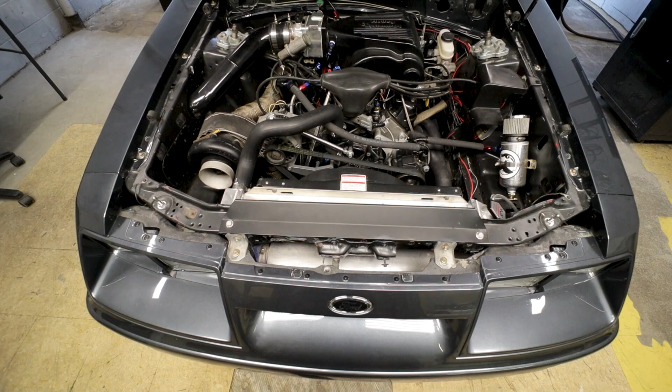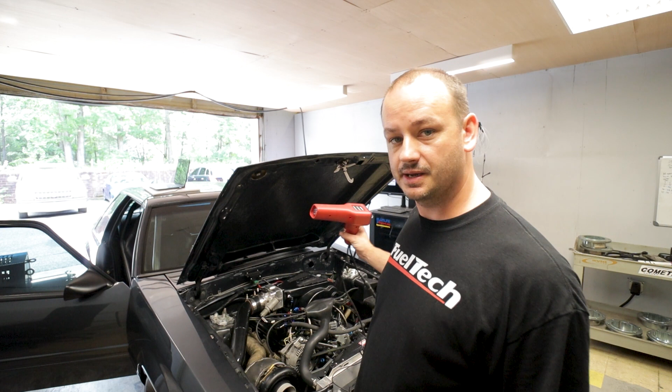It's running good. Playing musical cars, found that the startup and the idle needs a little work, so I'll tinker with that now. I'm going to set the timing, and we should be about ready to start trying to make some power.

So it requires a little throttle to start it, which means we need some more airflow, but I'm maxed out on airflow in the ECU, so we're going to need to make a throttle body adjustment. That's better.

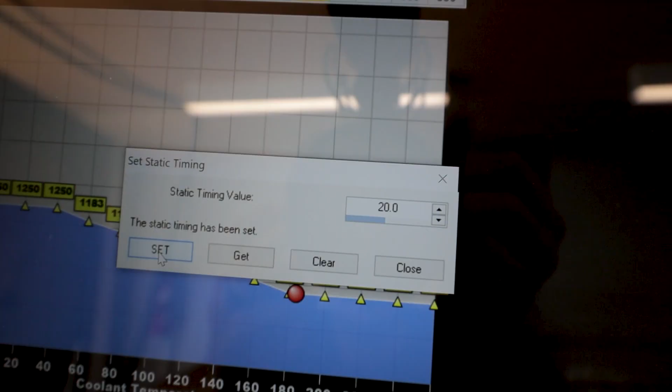Fuel looks good, closed loop's turned off. We need to let it warm up, and so far so good. So basically the timing's locked at 20 degrees right now. I'm sure you can't see it, but basically yeah, we're at 20 on the ECU, 20 in the timing light. They match up, so we're good to go on the timing.

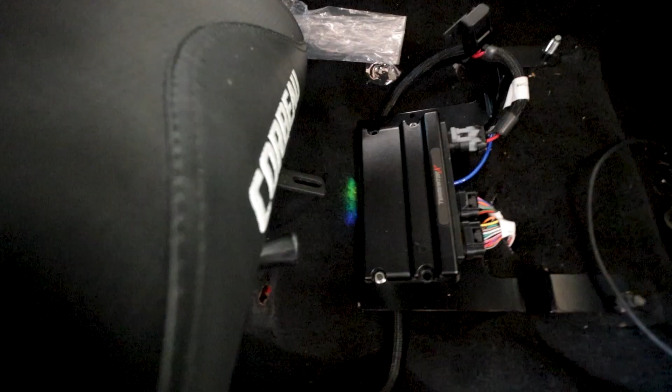Alright, so far it's actually running really good, responding pretty well. I raised all of the idle stuff up before I mechanically raised it at the throttle body, so now all that stuff's too high, so I gotta go back and lower all that back down, and kind of build the base map a little better than I currently just kind of did some idle stuff to get it up and running. So I'm going to do all that, and then we'll probably start being able to roll it on the dyno.

So the reason none of my idle control startup settings were working, and it was starting like trash, is because the idle control valve just doesn't work. So I'll spend a few minutes fooling with that, and if it's going to be something that's not quick and easy, then we might just have to come back to that at a later date.

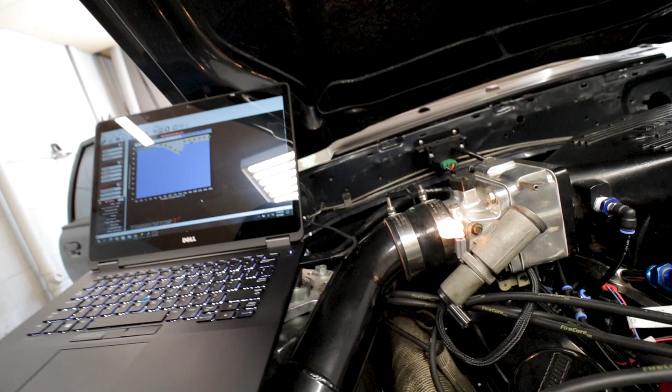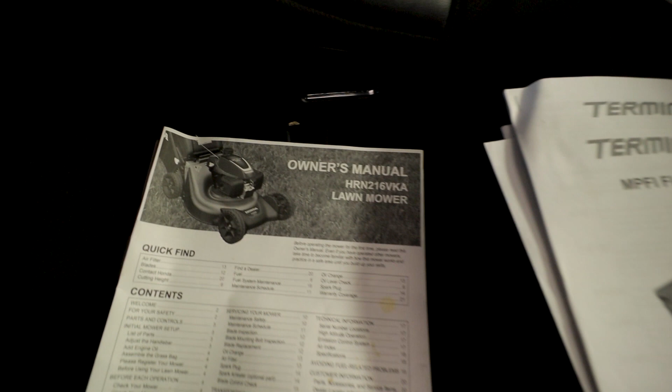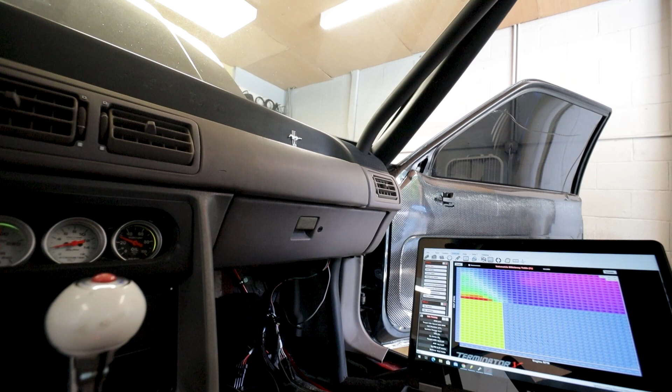Alright, so it is confirmed not working, so I don't know if it's the valve or the wiring. Guess I can use the test light, check it out real quick. I already knew it wasn't pulsing, but it's not pulsing. Let's see if we got 12 volts going to it. So I have power to it, just the output side isn't working, so we'll check into that real quick.

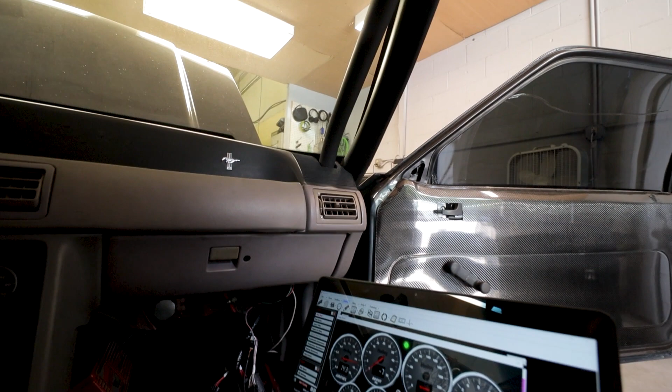ECU's under the seat, so I just wanted to verify some wiring. I've had some issues with these harnesses in the past, but got a noid light on it. Change some numbers around. Looks like we've got the idle working. Let's plug it all back up and see if it actually works for real now.

A couple manuals were left in the car. Not sure which one I should use.

Close. I'll mess with it a little bit more, but once you actually get the idle control valve working, the idle control is not too bad on these things. Okay, seems to be running pretty good now. Two problems I'm facing: if you bring the idle stop screw low enough that it idles at an RPM I'm happy with, there's not enough tension on it. It's just got a spring and then it backs itself out. So you might have to do like a stop nut or whatever you want to call it on there for that.

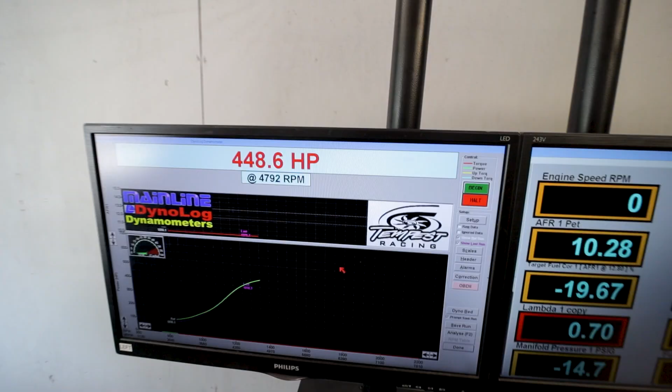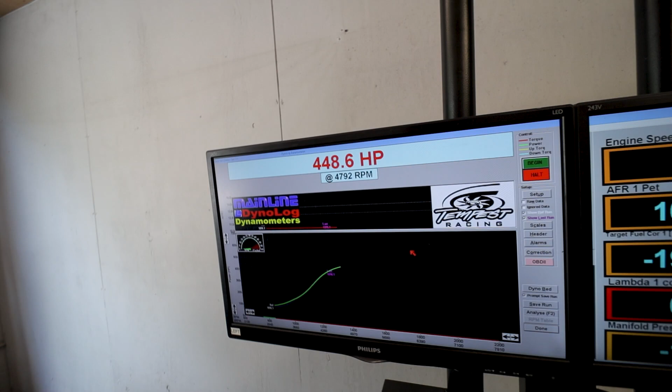About ready to start making some baby runs. Banged my head on the cage about 6 times now.

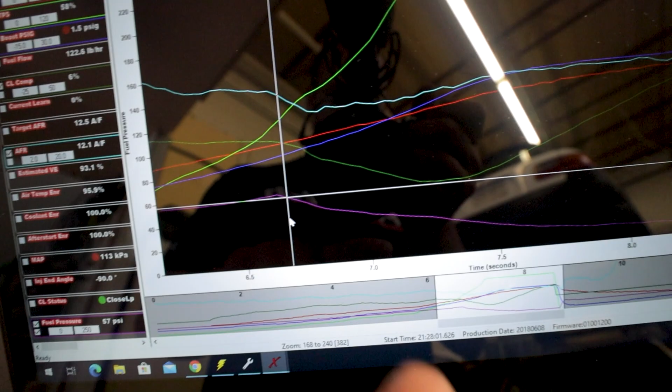I made first little baby pass to 4,000 something RPM. I have a feeling if this thing continues going at all, it's going to make too much power for what we're trying to do. Alright, plug looks good. I'm going to try it again. And this thing sounds like it's making 1,000 horsepower. It's kind of wild.

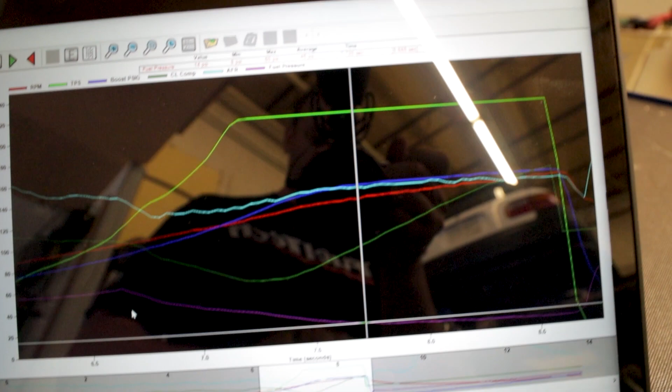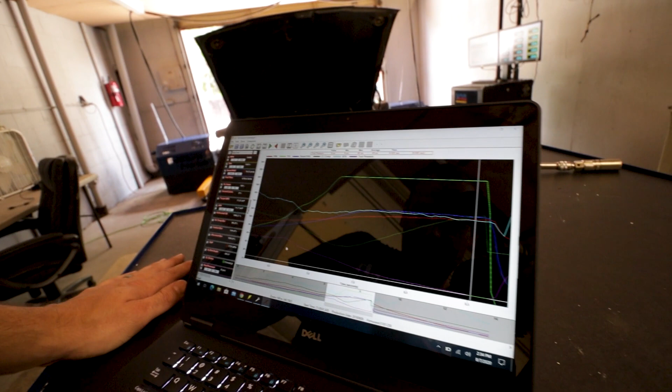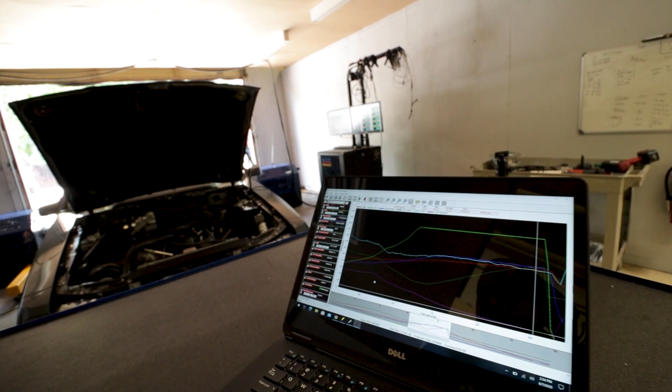Alright, power didn't go up too much, so that's good. The fueling numbers are just getting really wild the higher I go with RPM. I'm going to see if there's a way I can throw a fuel pressure sensor on this real quick. I didn't even see it. The regulator's tucked back there. Luckily it already has a fuel pressure sensor on it. But turn the lights off, maybe you can see better.

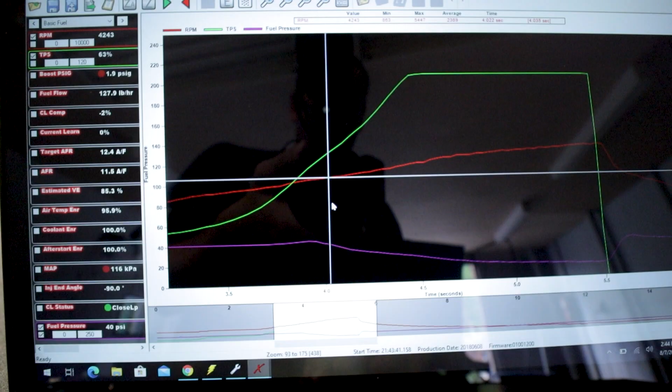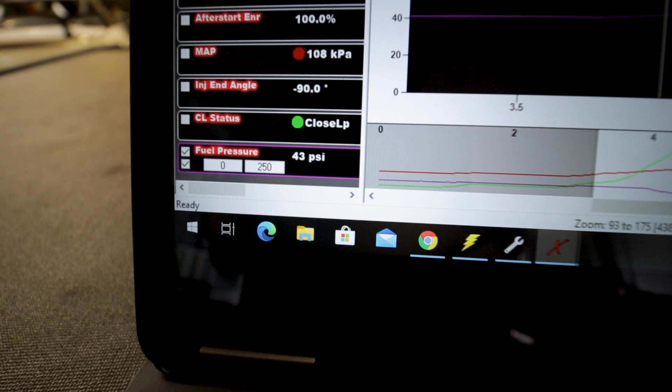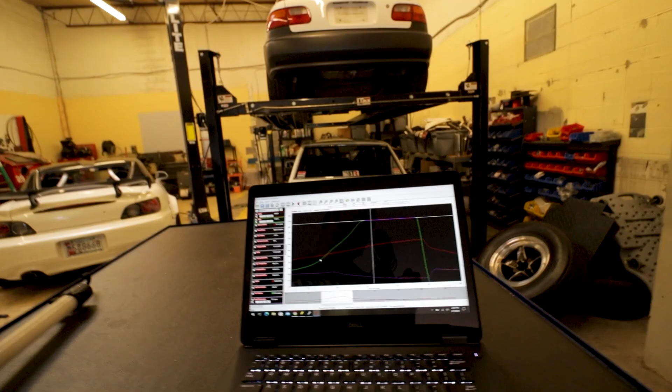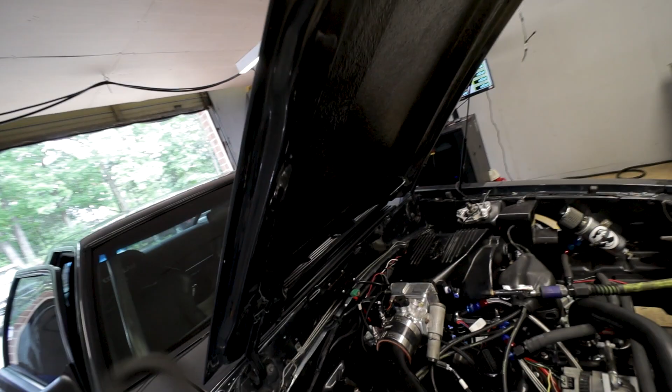Just looked at the vacuum lines and such, and everything looks okay, so I'm going to see what we have for fuel pump in there and see what we can do, and then I'm going to check and make sure that this sensor is scaled properly too. So I wasn't told that sensor was there to set up, but it was scaled wrong, so the value is a little bit wrong, but either way it's dropping like crazy.

And if you follow this purple line, you can see it just drops. And so fuel pressure is dropping all the way to 13 pounds, even though we're starting at 43 pounds or so. So it's like the exact opposite of a rising rate regulator. So not sure what's going on with that. The vacuum lines all look good, but something weird's going on.

So this fuel pressure is just dropping as if it never rises, so it seems more like it's a regulator problem than a pump problem. Alright, had a chance to talk to Brian, explain to him what's going on. Not often that I get to tell him that I was actually worried that it's going to make too much power. Given that this thing just got a stock block in it, they break pretty easy, and it's showing that it wants to make more than what usually works on these.

So that was interesting, but I guess he's had some fuel system problems in the past, and next on his to-do list was actually to do a full upgrade on the fuel system. So it looks like it's just going to be time to do it sooner than expected. So that's going to do it for this video, and I guess keep an eye out for round 3 on this car.